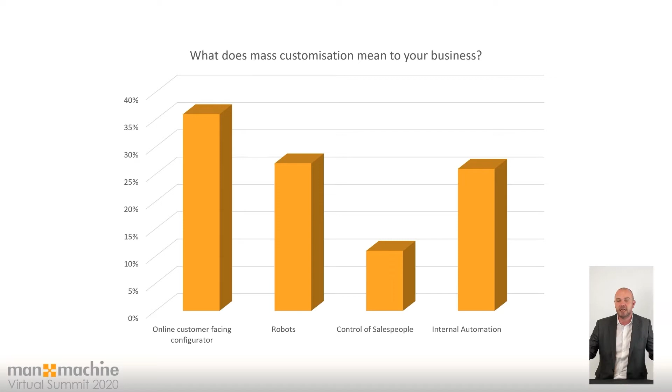So let's get into the slides. Basically, in the not too distant past, the idea of any manufacturing business customizing or personalizing their products on an individual customer basis has often been frowned upon. Mainly, if I'm honest, due to cost, the time it takes to deliver, and of course the resource that you have internally. Not really because it wasn't possible, but really because of the internal effect that variation really had on your overhead and your time, and that all comes down to your profit as a business.

So most companies over the years that I've worked with have always sort of opted towards the standards approach of product development, where you select a number of product variations that fit most customer scenarios. It's normally that sort of 80-20 ratio. Now, of course, depending on what your product is, you may or may not have satisfied 80% of your customers, but you've always got the specials, if you like, the one-off.

Actually, the way that I think about it, the world of mass customization, there's really a number of key benefits to most manufacturing companies, to a lesser or greater extent. The first, of course, is the obvious example that a lot of us think about, and a lot of you put in the question box, around the car configurator idea. The idea of customers being able to personalize their products, to see and experience what that product might be up front on a website or in a showroom, is really key to this area. But this is kind of the area that most people think about when they think about mass customization.

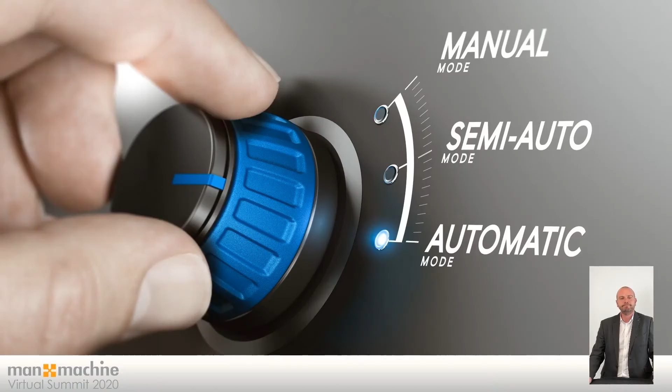Most manufacturing companies can see some form of benefit from automation, even if your products are truly bespoke. Perhaps the products are all different, but more often than not they're fundamentally based on the same underlying design principles. What if, instead of starting from scratch every time, or changing the last design, engineers could get to 80 or 90% of the engineering at a click of a button, and then just tweak it on top? How much time would that save?

Most of us think about the car configurator when the term mass customization comes up, but in reality, design automation has a huge effect on profits if it's done right, whether you're designing completely bespoke products or whether you are fully customized.

That's it from me, I'll hand you back to Robin. Robin's going to talk you through a specific example we've worked on with a customer who wanted to do all of these things, keep control of their salespeople, go straight from sales to manufacturing all in one hit, and use automation. Robin is now going to take you through the rest of their presentation.

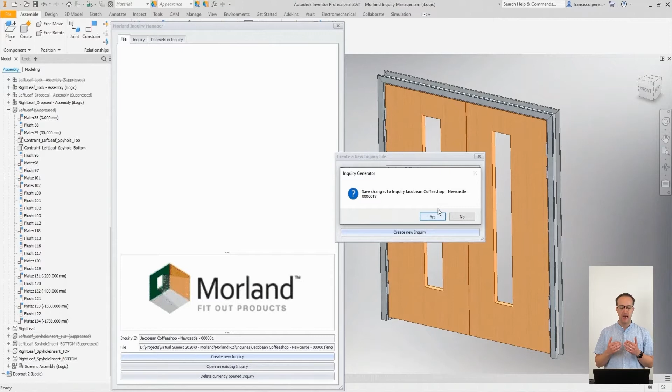So we've got something that's literally end to end. It starts in the back end, controlling a project. In this case, we have what we call an inquiry. That inquiry is a project, and therefore has a naming convention which it sets out. It puts a folder structure in place and allows you to configure it with a number of different properties and parameters regarding that particular project, which are called off later on.

Then that particular project will start with a door set. In this case we've just inserted one door set, and you can see, although this video is sped up, we can start affecting that particular door set, changing parameters based on information - what it's used for, changing parameters based on its price, or even changing configuration, such as it's a double door not a single door, it's a push bar exit, it's a handle exit, it's got a glazing vision panel, it's got a kick plate, and things like that.

We're going in and configuring this door. And those of you with eagle eyes will notice that in the background, when it's doing those updates to the model, it's also flicking up the drawing, because as well as configuring the full assembly and all the parts within that assembly, it's also automatically generating a drawing, a bill of materials, a GA, and some PDFs alongside that as well.

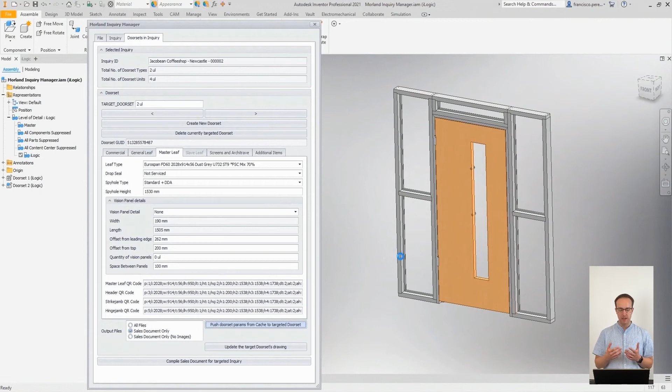As this starts to progress, you can see on the screen now some QR codes that it's generating in the background amongst some other information, and you end up with a project that's full of door sets. Those door sets are different configurations, and those on their own would take days to model all up individually. It's automating that based on some internal standards.

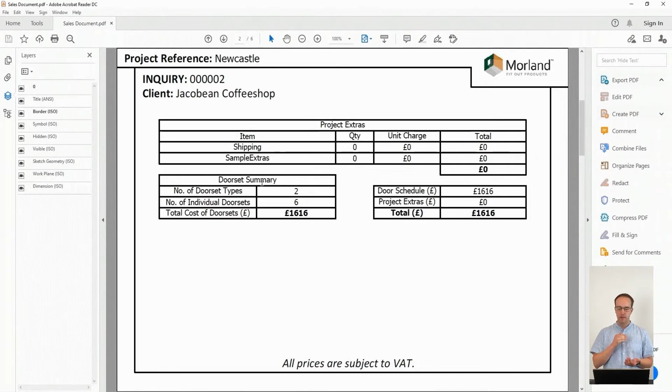We then press a single button and it's producing a GA and an individual manufacturing drawing for every single door set in the project. They're squirted out to PDF. And on those, you've also got cover sheets, pricing information, quoting information, and technical manufacturing drawings as well.

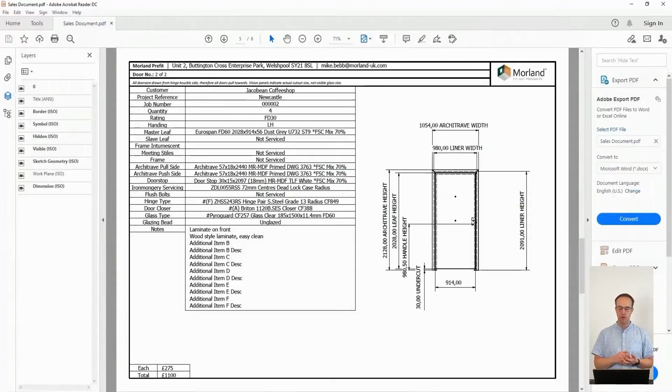So you're literally getting an end-to-end output directly from that single point of contact, taking weeks worth of work into minutes. So that kind of shows you how far you can get with iLogic.

As a configuration tool or an automation tool, it can be used for anything from the automation of a mundane task, something you don't want to do day in, day out, because it's just too repetitive. But with a little bit of thought and understanding from our side to see what your issues, struggles, challenges, or aspirations are as a business, you can really start to drive these things forward and produce some stunning results outside of standard functionality inside of Inventor.

Some of you may be looking at that and thinking, well, that's great. Others might be thinking, okay, how do I start doing that? How is this thing difficult? How do we start going on a journey to look at what we can do with this kind of out-of-the-box functionality in Inventor? Actually, to get started, it's relatively straightforward.

Obviously, we have the expertise and knowledge that we can help and share with you throughout any means you might require, be that training or some scoping and discussions. But what I want to do now is show you how quickly you can actually get started on your own, a bit of self-tuition, even following something else online, to give you a taster of where you can get to without too much difficulty.

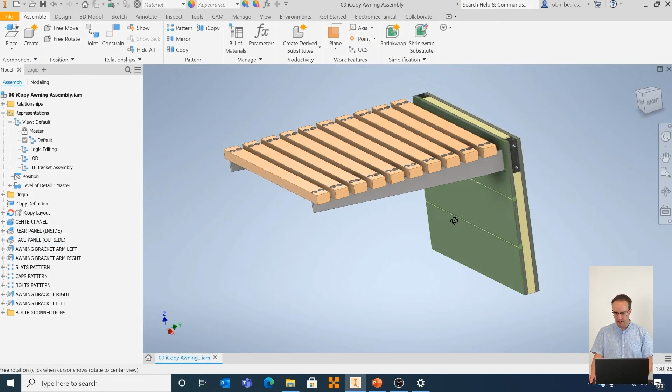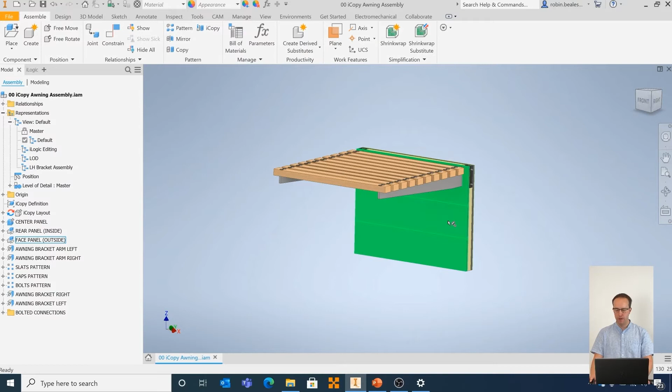So inside this assembly, which you're going to see several times throughout the technical sessions today - this facade we tell a story about throughout the course of the day, so you'll get used to seeing this data set, a really nice data set, well put together - and actually a great use of iLogic for this session, because naturally this is something that comes in all different shapes and sizes. They might be a meter long, 750, 2 meters, have 5 slats, 10 slats, those slats might be at an angle for solar shading. There's a number of different things here you could configure, and done correctly, we can have a product set up that's controlling all of those.

Actually, to get to this point, it's not overly difficult to think about what you need to do - a bit time consuming to put the bells and whistles in place. But essentially, we have an assembly, and inside that assembly, much like any others, we've got a load of parameters. In a typical assembly, you might not have loads of custom parameters - you may just have parameters that are driving a joint or a constraint.

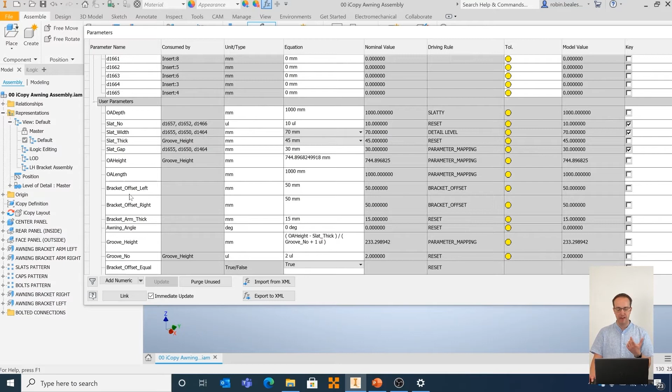If I scroll down, you can see that we have a wealth of user-based parameters. I'm not going to go into the nth degree of those today, but they're controlling different things inside of this model. For example, the bracket offset on both the left and right-hand side, the gap between each of the individual slats, the number of slats, and the angle of those slats, or the angle of the awning.

The reason those parameters exist is because they are referenced. Inside of iLogic, which is essentially some simple VB-based code, it points towards a parameter or a series of parameters, and it changes them. Those in turn are linked to a constraint, a part, an assembly, a drawing, or an iProperty. By updating those, it updates the model, the drawing, the BOM, or whatever else it's linked to.

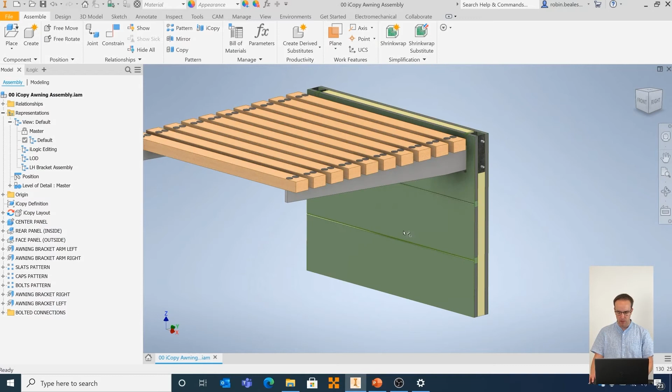So for the purpose of this, what you can see is this nice model, looks great. And if I go to my iLogic tab in my browser, if that's missing because you've not used iLogic before, you can head over to the View tab. You've got this user interface drop down, and you've got iLogic just here. Or in 2020 and newer, you can press the little plus to show different tabs automatically. So if you don't have iLogic and you want to get started, you can just show it.

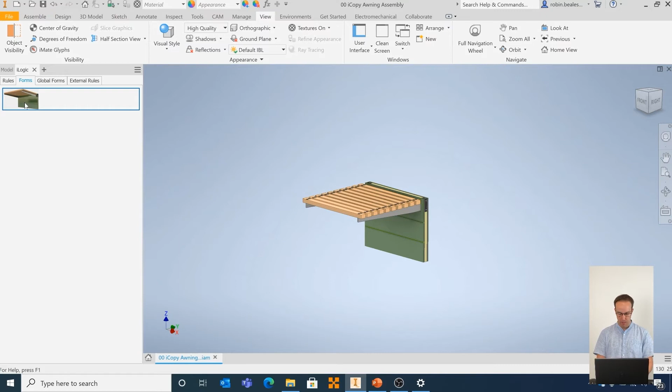For the purpose of this, I'm not jumping into all of these different tabs and going through a full, click-by-click, how to do this and how to do that. But we have rules and we have forms. I'm just going to open up a form and explain that within that form, we have a number of different things controlling rules. A rule tells Inventor to go and do something. A form just controls that.

For the purpose of this, I have a form on the left-hand side here, and I've just got a basic drawing that's going to explain what it is that I'm changing. So for the dimensions, I might say, well, I don't want 10 slats, I want to have 8 slats. So I can come in and either type in or use this slider to control how many slats I have.

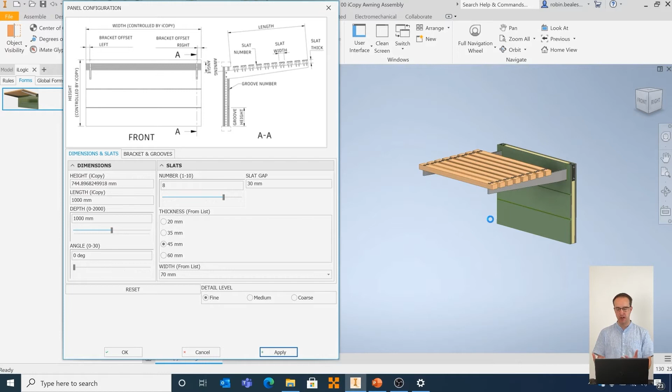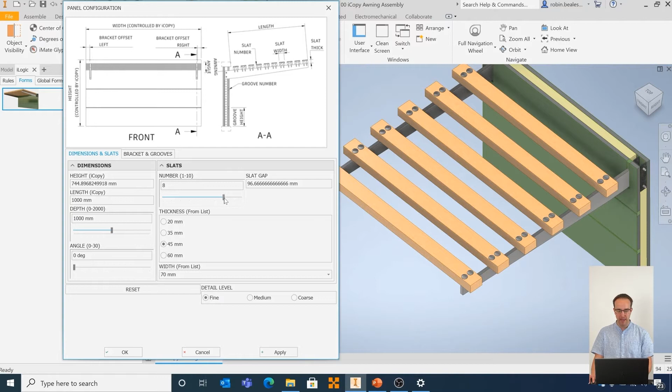It might be that I want to apply that and see that change straight away, in which case you'll see the model go ahead and update. Not only has it changed the number of slats to 8, if you watch again, I'm going to drop it down to 6 - it's changed the number of slats, but then it's regenerated the model so that any constraints, any gaps, everything's updated. This slat gap on the right has gone from being considerably less than 96 millimeters to 96. So everything's becoming calculated and controlled by iLogic as we go through.

It might be that I want to change the thickness. So we've got some standard sizes here, 20 through to 60 millimeters. By changing those, it's going to change the thickness of those slats. Again, everything relating to those, such as the bracket positions, where they sit within the model, will all update.

Which again is fantastic. I can come in and start changing the angle. So maybe let's say that we want to have 10 degrees, I want to go down to 6 slats, and I want to have a 45 millimeter thickness on those slats. If we apply that, it will go ahead and do all of those changes.

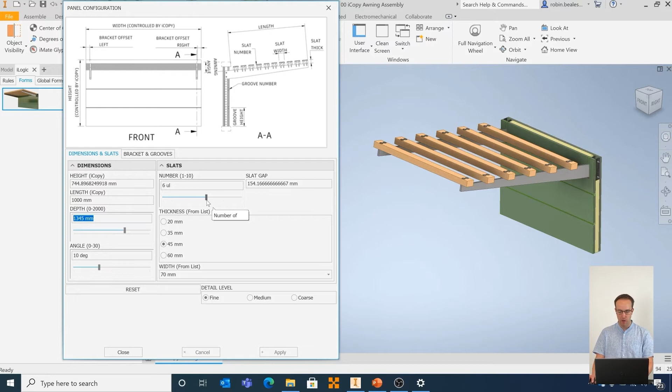This is where you start to say, okay, this actually looks pretty cool. I'm no longer just changing one thing at a time. I can actually come in and start controlling a number of different things about this part, this assembly, this configuration, and I can change them on the fly. All of this is just visualizing for now - it's just an example to show you how this works. But it's a really nice example to explain what it's doing, why it's doing it, and how it's doing it.

As well as working, in this case, with the overall dimensions or the brackets themselves, the slats themselves, I might want to go and do something specifically on the brackets, for example. So I might want to turn off an equal offset and just change one of the offsets individually. Go ahead and hit apply, wait for it to update, and it will go ahead and change those offsets. If you want them to be equal again, tell them to be equal, and it will once again go and update the model.

Maybe I want to have more grooves in the panel there at the back.

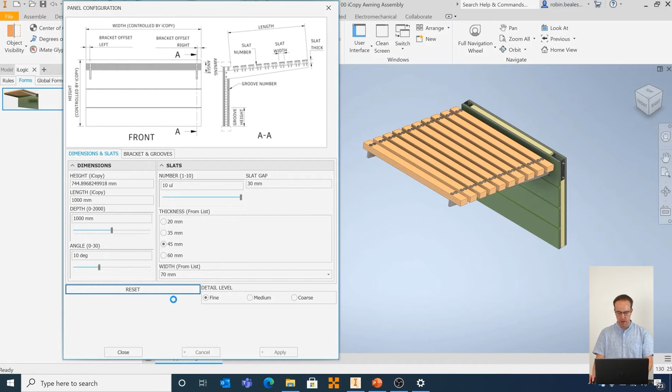I can turn that up and down. Everything starts working automatically. We can even start doing a little bit more on here. So I'm just going to reset this back to defaults with a nice handy reset button, which will put this back to its standard configuration.

Now I'm going to show you that we can also do things like controlling level of detail. This isn't necessarily going to drive an Inventor LOD. This is actually turning things on or off dependent on what you set inside of iLogic. So it's giving you more functionality to control how this might be shared with a BIM authorer later, which you'll see a little bit later this afternoon, in how we control the look and feel of those products before they're exported into Revit.

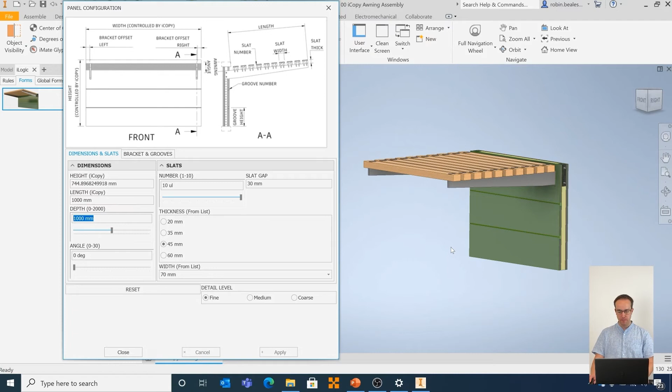So what we have there is something that works really well. And naturally in the background, if I just go and open up the drawing for this particular model, let's go ahead and open up the standard GA, just to bring this all together. We have a drawing. Naturally that drawing, if deferred updates weren't turned on - in this case I've deferred my updates - if my model updates, my drawings update.

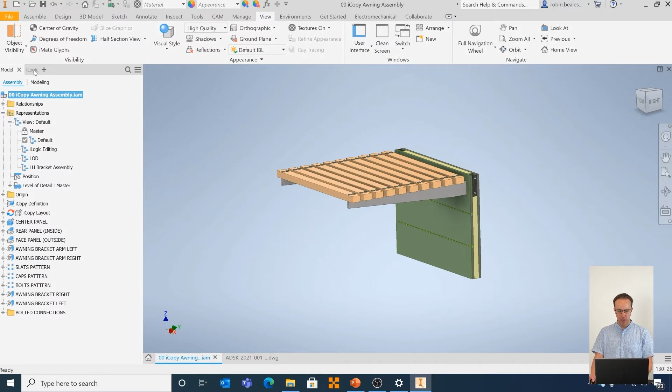And this links back a little bit to what we showed you earlier with the client configurator that we worked on. If I just go and open up my iLogic here, go into my form, I'm just going to make a change. So maybe we'll go down to 5 slats and apply that.

And maybe we'll also just change the angle to 10 degrees perhaps. Need to keep remembering that I didn't make that a type-in, I made it a slider. So let's apply that. And if I go and jump into my drawing, turn off defer updates and make sure...

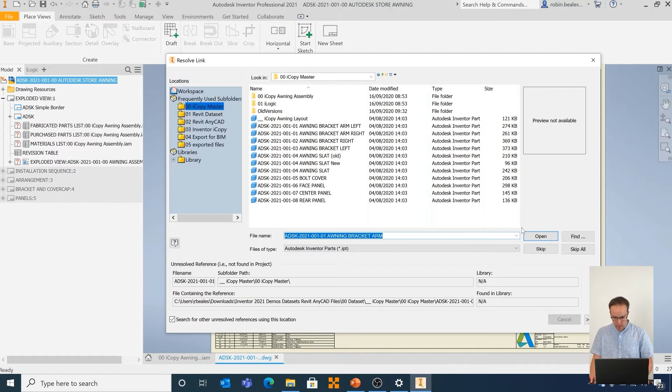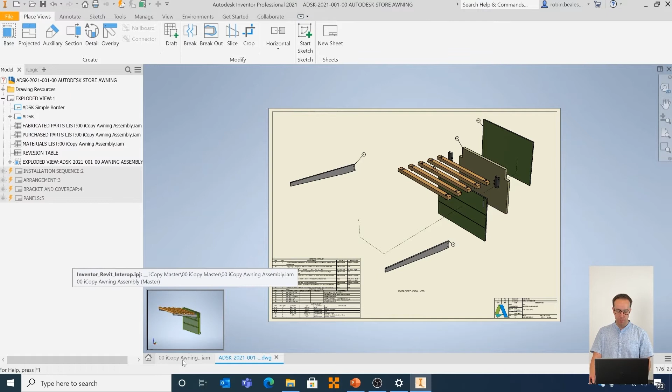I'll just skip the references for the purpose of the live demo. You get the picture. Because I've deferred updates on the drawing, it's lost some of the references there. But as you can see, based on the configuration, 5 slats and the angle, the model went and updated, which is what you'd want it to do.

If I go and set more slats, jump back into the drawing, give it a couple of seconds, it updates. So that served me right for going and showing something that I didn't necessarily plan to show as part of this demo, but hey, the joy of live demos.

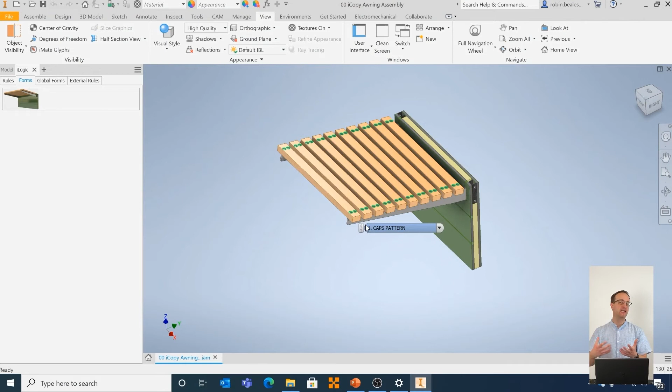So that aside, we have a configurator. That configurator drives, in this case, an assembly through a series of rules. Now this is all very well and good, but how do we get to this particular point? What we have is a series of rules.

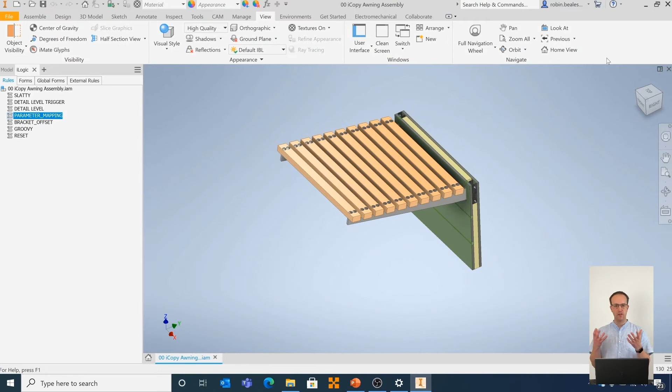Now I'm not going to go through all of these rules in this model because they're already developed. If I go and edit one of those rules and show you we've got a load of different lines of physical code in there, it's not necessarily going to mean anything to you if you're new to this stuff. So what I want to do is strip this back again and literally show you how we start getting to this point of using Inventor with iLogic.

And I'm just going to do this on the fly, just so there's no cotton pulled over people's eyes - no wool pulled over people's eyes, sorry - and you really understand how that works and why it works.

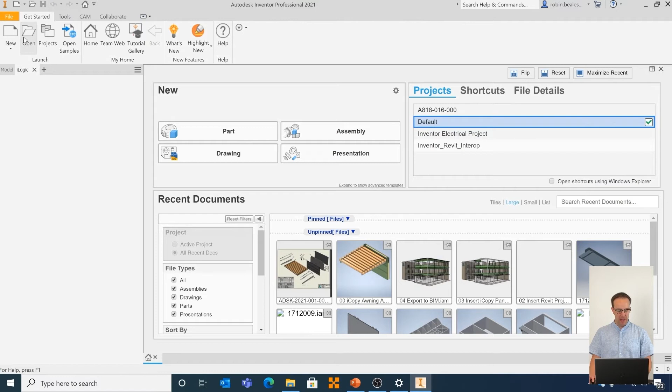So I'm just going to change my project here from the Autodesk sample model. We're just going to jump into a default project. And then from there, we're going to start a new file and use a simple piece of sheet metal. And with that piece of sheet metal, maybe we'll just do a standard L bracket, put some holes in and show you what we can do to start driving it.

Now I'm at part level, so I'm keeping it nice and simple for the purpose of this demonstration. But as you've just seen, we can do assemblies. And as you saw earlier, we can do all the way to automated drawings as well.

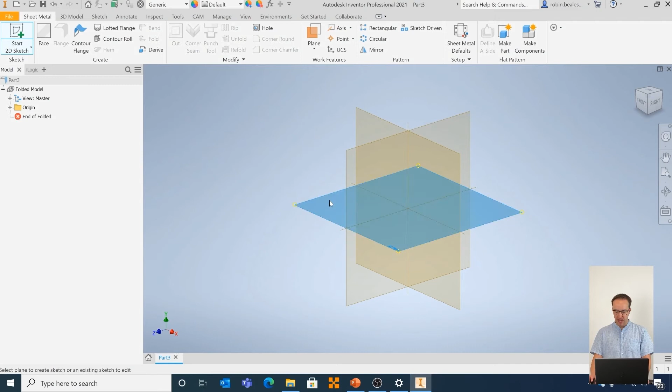So let's start off, as you would in any other part, by creating a standard sketch. On that sketch, I'm just going to draw on my plane here. I'm just going to start drawing a standard face in sheet metal. Now the main difference here that I'm going to do...

...is I'm going to start placing dimensions and parameters from those dimensions quite early on. If I was normally coming in and drawing, maybe I would just place in some dimensions and not worry too much about them being d0 and d1.

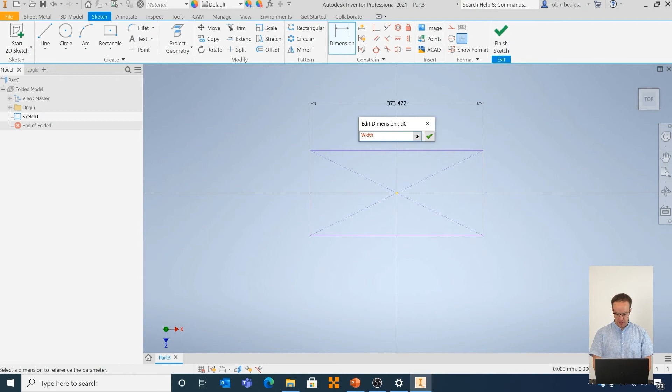But in this case, I actually want to name them because that makes my life so much easier moving forward. So I'm going to start by saying, well, this is going to be my width. And I'm going to say width equals, let's say, 350. And then we'll come in here and say that one is the depth, and we'll say that that equals 150. So all I'm doing is giving it a name and then typing equals.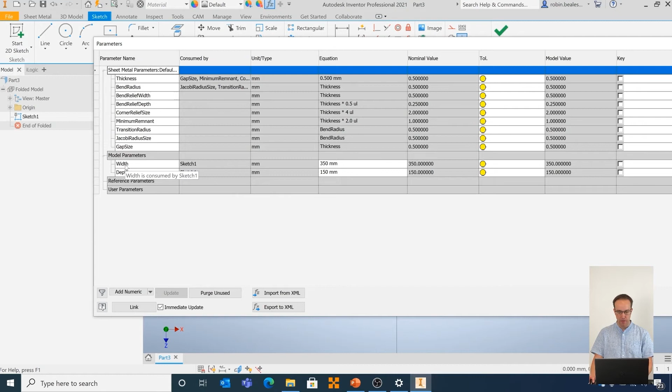By doing that, you're telling Inventor that I want to name that parameter, which for anyone that doesn't know, if I went into my parameters dialog box and had a look, it basically creates some model parameters with those names and those values. So rather than having D0 and D1 in Inventor, your default first two dimensions, you've got one called width and you've got one called depth.

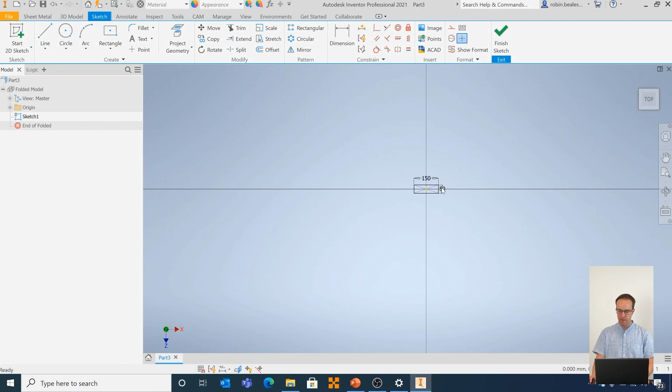Now they're a little bit too big for what is going to be quite a small bracket. So in this case, I'm going to say we've got 150 by, I don't know, about 50. Will be absolutely fine. Maybe a little bit deeper, 75. And from there, I'm going to finish the sketch.

I'm not too fussed about my sheet metal defaults for the purpose of this. I'm just using the standard 0.5 mil thick rule. Maybe I'll just make it a little bit thicker just to make it a bit easier on the eye. And literally, I'm just going to create a face on here, and I'm going to press OK.

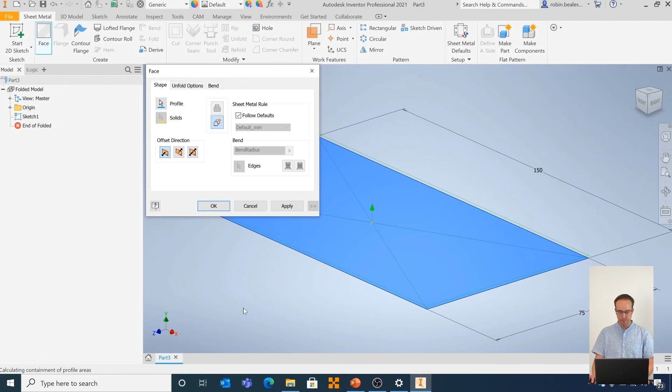From there, I'm going to flange on this edge upwards 90 degrees, and I'm going to go upwards by a height. But I don't necessarily want to just pick any old height. I want this to be symmetrical or asymmetrical in both directions. So I'm just going to type in here, well, I want that to be depth.

I don't need to give this one a name because it's just driven off this. I might say that I want to control them separately and therefore make that height equal something, but it doesn't need to be that complicated with this particular example. So I'm just going to say that equals the depth.

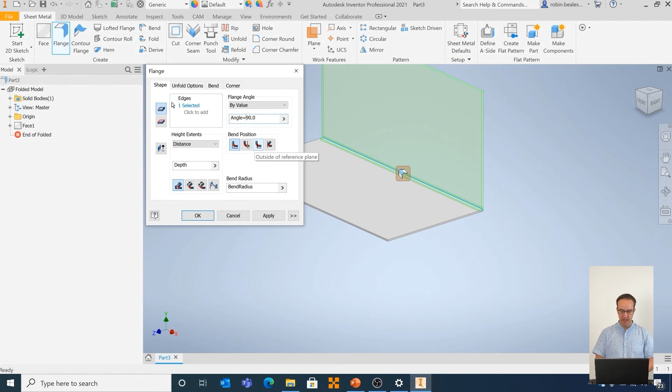What I do want to do is change the angle. So I'm just going to change that to angle equals and make it 90. So far, really straightforward. We have a simple angle, depth, and length.

I'm just going to go back in and change that thickness again. I know I said I'll make it 1 to make it a little bit easier, but I'm going to make it a little bit bigger still just to make it even easier to see on the eye, just so it looks a little bit more like what I'm after.

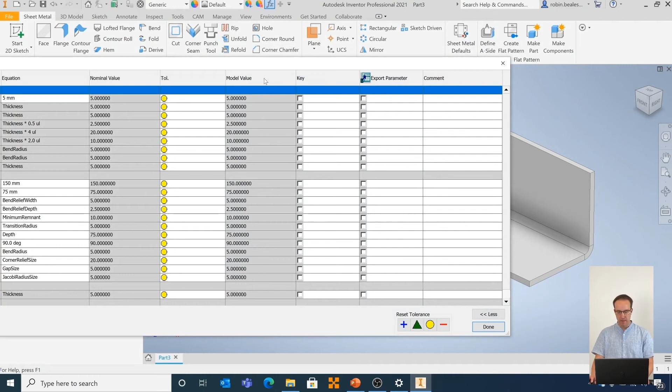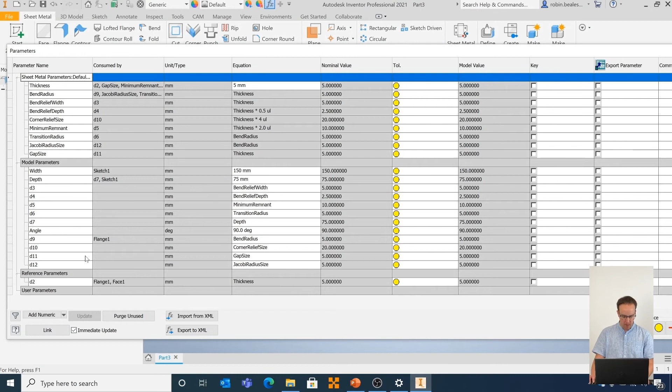So there we go. We've got our component, and anyone that's used Inventor will know that I can go into my parameters now. Let's just come across, and apologies for the size of that dialog box. It's because of the 4K monitor that I'm plugged into on the other end.

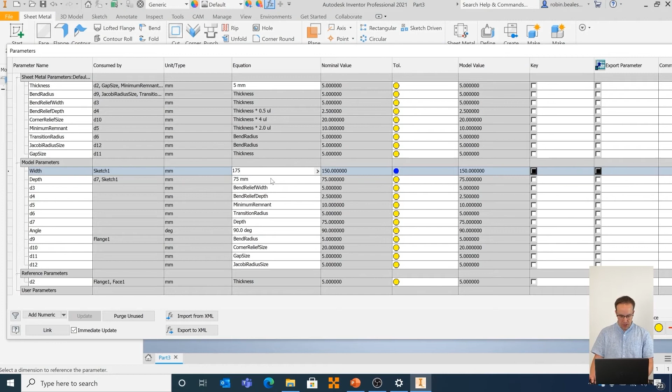My apologies to that. It's not scaling particularly well, but what we'll do is we'll just go and find our width at 150, and I'm just going to up that to 175, and I'm going to change my depth to be 100. I'm going to press done, grab my measure tool, under inspect, and identify that that has made the change. So nothing different there. That's literally standard Inventor 101 and has been for years.

Standard parametric modeling. However, I'm going to go into my iLogic. And in there, I'm not going to do rules for now. I'm going to go straight to forms. I'm going to right click and say add a form. That gives me a simple interface with a form which I can start working with.

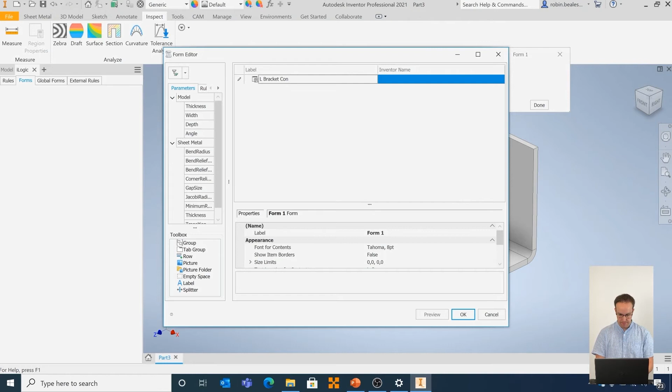So let's call this L bracket configurator, or just config for short. And on there, I'm just going to drag and drop some of these parameters that I have. So I have a width, drag and drop, a depth, drag and drop, an angle, drag and drop, and maybe we want to even throw the thickness in there as well. Why not? Maybe you want to start organizing these.

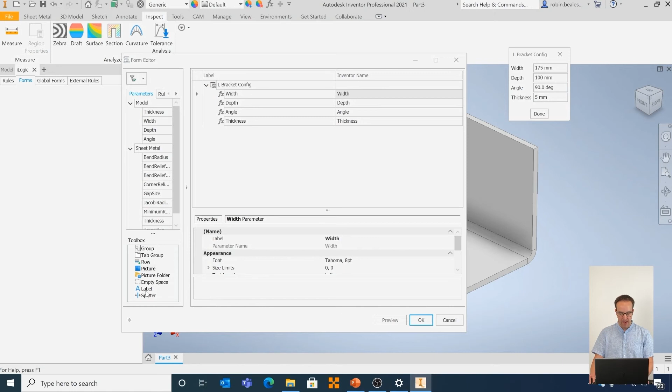So you could put a picture at the top, should you want to. I'm not going to do that for the purpose of this. I'm going to make it very generic, but maybe we want to come in and say that we want to add a label at the top. That label is going to have a piece of text which is please define parameters.

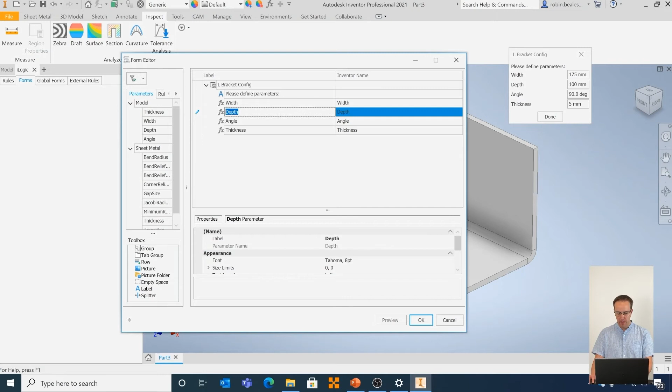And then for each one of those, I could say that I want width to be a type in, maybe depth I want to be a type in, but maybe the angle down in here, rather than a text box and a type in, I want that to be a slider. Slider properties could say it's unlimited. They could say that they are minimum maximum values. So we could say minimum angle I want to have is 22.

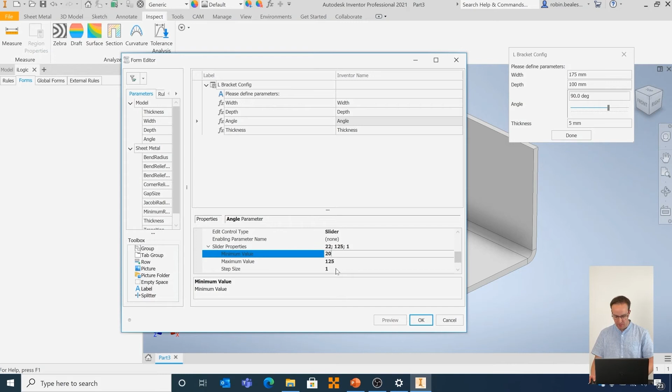Maximum value we're going to have is 125, and then maybe we want the increment size to be simple, so we go from 20 to 125 with increments of 1.

Hit OK. If I open up that configurator we've just put together, or that simple form, we can come in here and say I want the angle to change, and it will dynamically update the model live. No issues at all. If I right-click and edit on that form, I can come back and say, okay, well, great, but I don't want a done button.

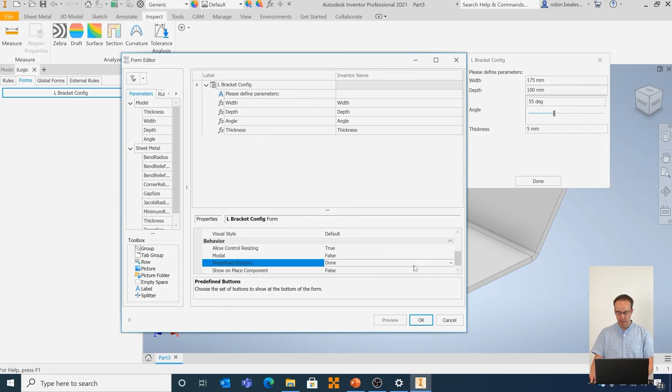I want an apply button so I can actively see changes on the fly. So we can define that our predefined buttons are OK, cancel, and apply. Meaning that now if I start up that form, I can say that I want this to be 200 and this to be 125, apply. And by the way, I want my angle to be 90 degrees. Press OK. So nice and easy.

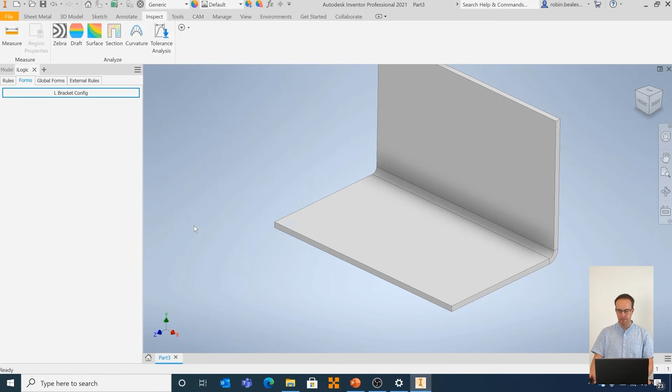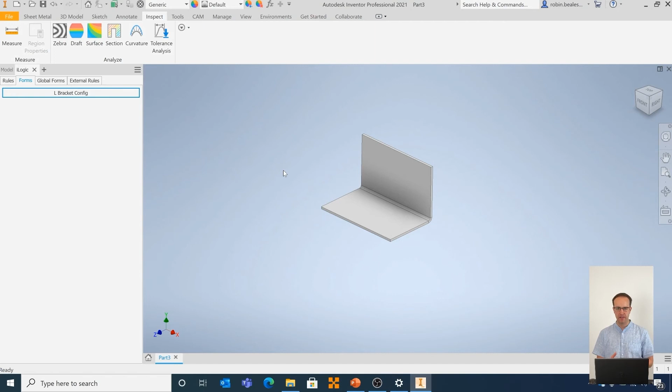So very quickly, you can take standard parametric models and convert them into form-based models using iLogic. But that's not where the power comes in. For me, the power is there when you start thinking about intelligence and rules, things that designers are having to think about or work out daily, or things people just have in their head from the amount of time they've been with an organization, working with a product, working with a standard or whatever it might be. And that's where rules can really, really help.

So I've got this simple design. What I am going to do is change that slider that I put in for the angle. I wanted to show how easy that was to put in. But as you've noticed several times throughout this demo, I much prefer a text box so that I can be a bit freer with what I type in.

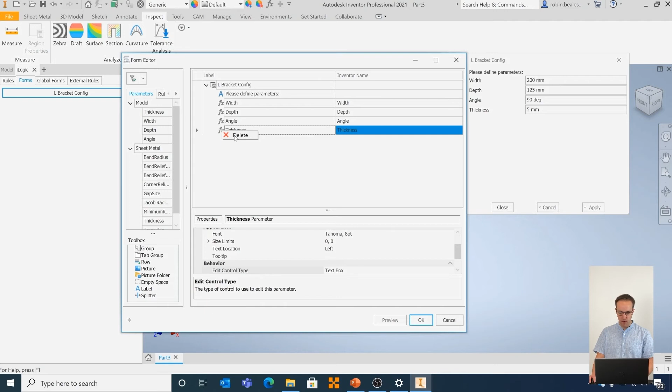So let's go in there, and actually we'll take the thickness off. So we'll just right click and delete the thickness out. And we'll hit OK.

From here, I'm going to do a couple of things. Firstly, I'm going to go back into the model, and go into my sheet metal tab. I'm going to add a new sketch on this face. Again, I'm going to try and keep this quite simple for the purpose of today, because some of you might be very new to iLogic.

So what I'm going to do is create a series of holes. I'm just going to create 3 holes. Those holes I'm just going to dimension like so. I'm not really fussed what the dimensions are for the purpose of the demo, but I'll make them something that's rounded up. So let's just say we're going to go with, let's go from there to there, put that there, accept.

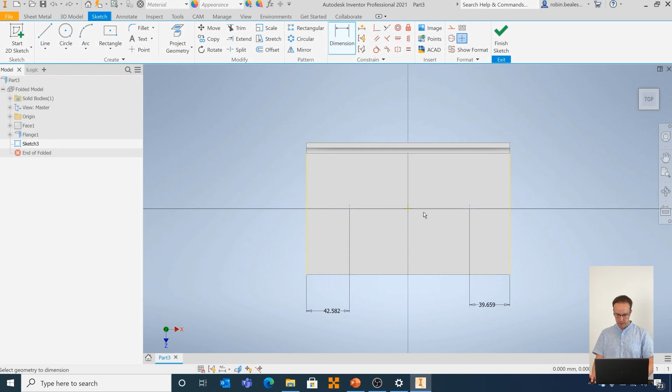So you are going to be this one divided by 2, and you are going to be this one divided by 2. They're never going to change, so I'm just going to leave them as they are. But I've got 3 points, one here, and one here. I'm going to say finish sketch.

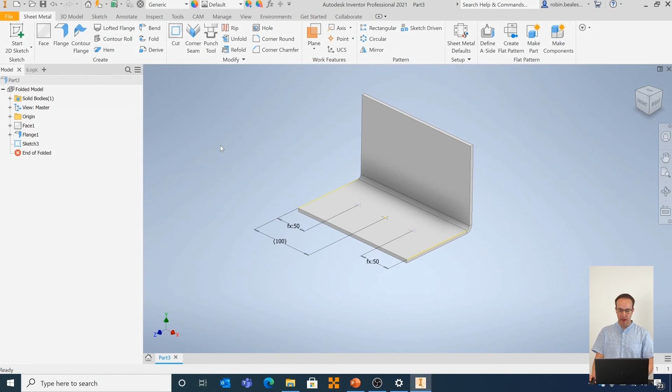And then I'm just going to be quite lazy about this, again trying to keep it nice and simple. Not necessarily saying this is best practice with Inventor modeling, but I'm going to create my hole tool. Let's just use the newer functionality to get that on the left-hand side, which is great. Kind of reminds me of Inventor release 11, release 10, and older, when you used to have all of the properties on the left rather than the tools on the left rather than the ribbon.

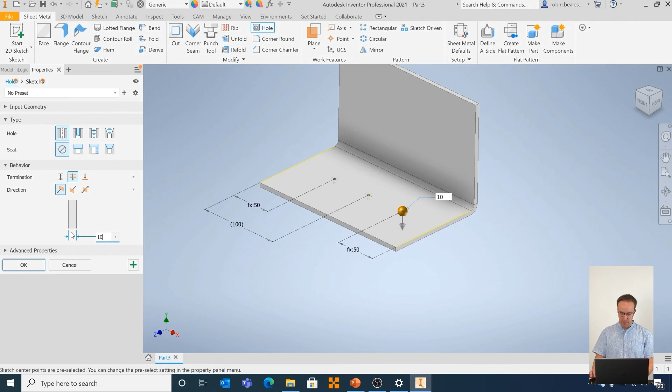So yeah, let's create a hole. We're just going to go for a simple hole. And then let's say that for the purpose of this, just, I don't know, 25 mil, something like that, just so that we've got something that we can see. And that's picked up my centers, and that's got 3 holes.

But actually, I only want it to pick up on one of them. I'm going to be super lazy. So I'm going to place this one. I'm going to press OK. I'm going to go into my hole, drag and drop my sketch above to share it. Top tip, if you never knew that, you don't have to right click and share a sketch. Just literally drag and drop it above its feature and it shares it.

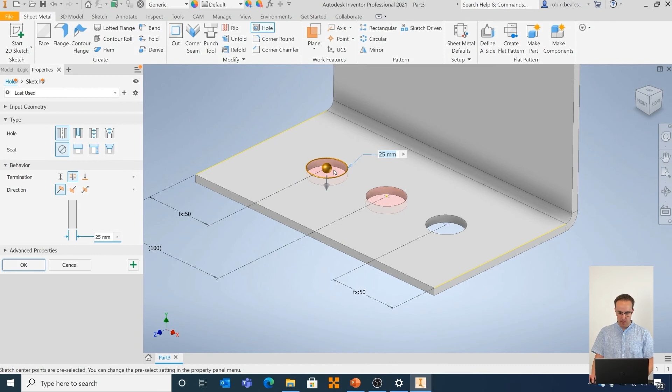Love that one. Sorry, inner geek coming out again. I'll continue. So same thing again. I should have done this with patterns, arguably, but I wanted to show this and give you an understanding about what it's doing.

Let's add one in there, and then maybe one in there. So specifically, I've got 3 individual holes. You could have also done it with a pattern with 3 instances, but I wanted to do 3 separate holes. Now what we have is hole 1 on the right, hole 2 in the middle, and hole 3 on the left.

I'm going to go into my iLogic, go into my rules, right click and add a rule. And let's just call this Virtual Summit.

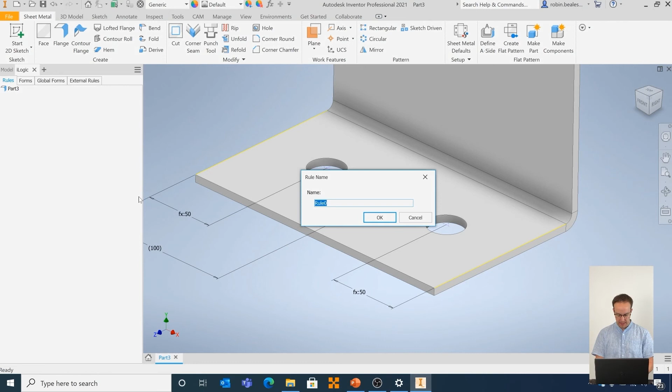Within there, I'm not going to worry too much apart from just explaining that it doesn't matter if you know code. So if you know VB, this is based on VB. So anyone that develops in VB.net, VBA in Excel, even standard Visual Basic, they'll feel right at home with this. It's very easy to use.

However, if you're new to code, all you need to know is that this is very well supported in the community, so we can help you. There's a wealth of information out there on the forums. It's very easy to get started, but by all means do come and talk to us about some tips.

We also have a number of snippets that come out of the box with Inventor and allow you to just do stuff. So what I want to do here is say, if the length is a certain size, it's two holes. If it goes over a certain size, then it turns on the third hole. So just some basic configuration-based logic in there.

So all I'm going to do is say, well, I want an if statement. I've got a button here that says place an if statement, but I want to replace my expression with an actual expression. Literally, if I just expand these nodes at the top, I can go in and grab stuff that exists in the model, then double click it, drag and drop it.

So I'm going to come into my model parameters, and I can see that I have all of my parameters that I created earlier on the right hand side here. Okay, so I've got my model parameters for thickness, width and depth. I'm going to say, if double click width is less than...

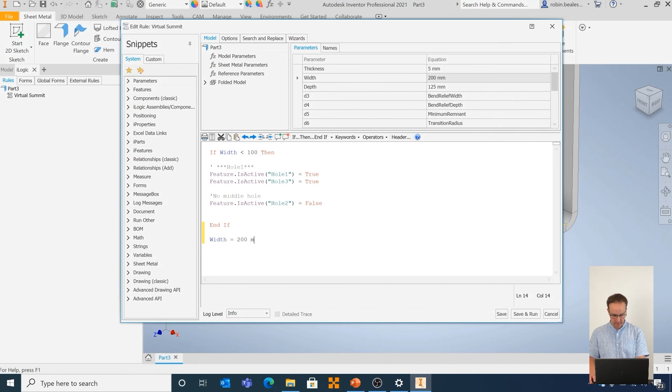Go and grab the... okay, bear with me, again the joys of live demos. Let's go into there and grab the width. Have to add the millimeters to the end. So if it's less than 100 millimeters, save and run.

Good. Go on the form, go into the bracket. It's currently at 200 mil. If I go and change that to 99 millimeters and apply it, we get 2 holes rather than 3. If I change it to 100 and apply it, we get 3 holes. If I change it to 101 and apply it, still get 3 holes.

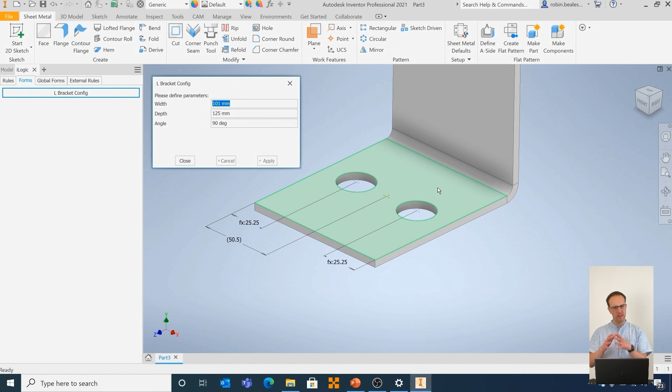Why? Well, I haven't told it the opposite - I haven't told it, if anything else, then put 3 holes on there. So quite simply, we can go back into the rules, edit it with a right click, and say, okay, well, if anything else happens, copy all of these, paste them in, make them all true, meaning that if the width is more than 100 millimeters, it will turn on that third hole.

Now, this actually gives us a little bit of a problem, as you can see here, that you would never be able to manufacture that.

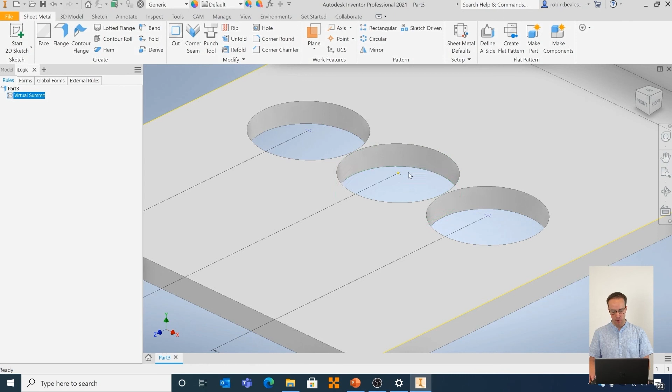So all I'm going to do is go in and tweak that, use a little bit of logic and say, well, actually, that should be anything over 150 millimeters. Therefore, my form now, if I open it, change that and put it on 160, I get 3 holes. If I change it to 149, I get 2 holes.

And that's just a quick example of how quickly you can start working with iLogic. Really simple example explaining, okay, you've got some VB code, you've got something that's allowing you to control the parameters inside a component. I've shown you 2 examples, or 3 if you include the video, of a full end-to-end workflow, just having a parametric model and now a simple, how do we get started, just to give you a taster.

From this point on, it's just a case of, okay, is this something we can help you with? Do you want some advice on how to get started? That could be some fundamentals training. That could be a discussion about, well, we quite like the look of this fully automated procedure, can we have a talk about it? The world's your oyster at the end of the day. You already have the software with Inventor that allows you to do this kind of stuff. It's just a case of, is it useful? Have you got use for this in your workflow? And if so, is there anything we can help you with?

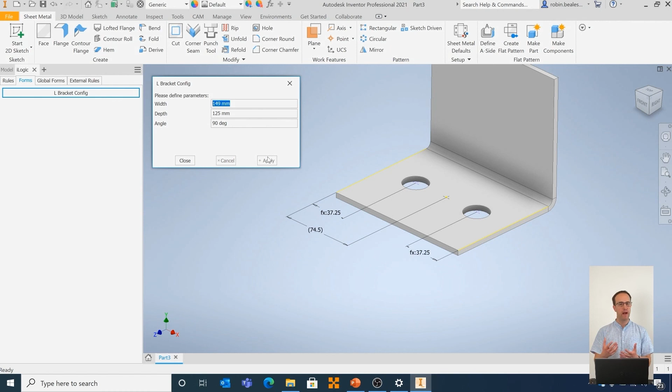So I'm going to jump out of Inventor now and just go back into the PowerPoint and start wrapping things up. So back into PowerPoint, I'm afraid, but I've literally got just a couple more things to say before we go into a short break.

So really, I just wanted to push what hopefully you've seen as a huge potential or opportunity, more than anything else, to maybe get a little bit more out of your investments. Start seeing some bigger ROI on those investments to your subscriptions, because again, this is all out of the box stuff. It's not an add-on, it's not a bolt-on. It's just, is there anything we can do to make things easier? Whether that is as simple as dragging and dropping some parameters onto a form, like I did first of all in that very simple demo, or if it's looking at going the whole hog and looking at a full end-to-end configurator.

I think these things are more accessible now than they have ever been before. There's so many different ways that we can tap into those different workflows and use them either on a small scale, let's do a mundane task quicker, let's automate that mundane task. Let's take every face in this sheet metal part and just export the DXFs automatically so we can import them into another piece of software. Let's go and just create PDFs automatically whenever we do something. All that kind of stuff.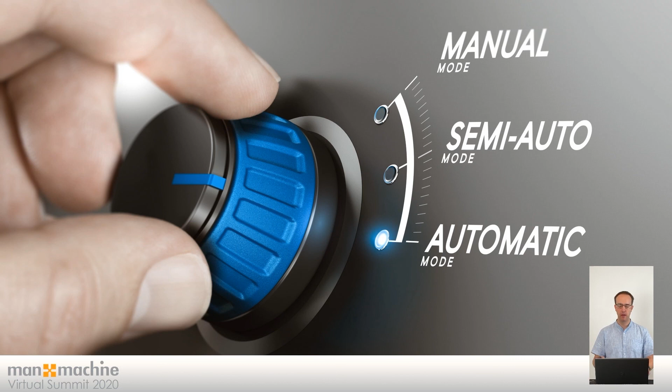It's accessible and it's not too difficult. We can support you in it. We can help you with it. So yeah, let's see what we can get to. But really interesting session that for me. So thank you for joining us for the session.